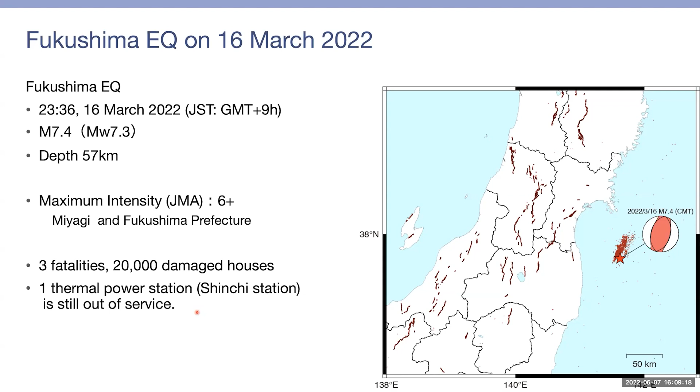This earthquake occurred in the offshore region of the Tohoku area, but this area recorded a very large earthquake in 2011, the so-called Tohoku earthquake. The Tohoku earthquake was an interplate earthquake between the Pacific plate and the North American plate.

But this earthquake occurred inside the ocean plate, a so-called intraslab earthquake. This is recognized by the distribution of the aftershocks of the main shock. The Japan Meteorological Agency found that the aftershock distribution aligned to an eastern dipping fault plane.

Therefore, we can recognize this earthquake has a reverse fault type mechanism, and the aftershocks and fault plane are aligned in the north-south direction. That almost coincides with the direction of the fault plane of the 2011 Tohoku earthquake, but the earthquake type and mechanism are very different from the last one.

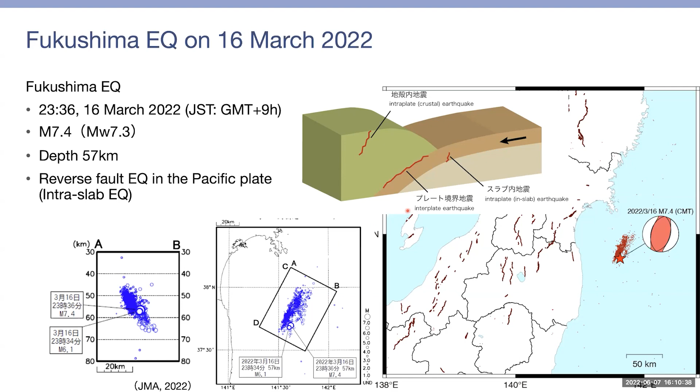But this kind of intraslab earthquake is not minor in this region. A major intraslab earthquake was observed last year in February 2021, at almost the same location of the hypocenter. For example, in this earthquake, the hypocenter is marked with the star in this map, and the aftershock distribution aligned in the northern part of this hypocenter.

But in the 2021 earthquake, the hypocenter was located at almost the same location, but the aftershocks distributed on the other side of the fault plane. This indicates that the 2022 earthquake and the 2021 earthquake have a very similar intraslab mechanism, but the fault is very different.

This earthquake in 2022 ruptured toward the northeast direction, but the 2021 event ruptured toward the southwest direction. That was quite a different characteristic between 2021 and 2022. Also, several different types of intraslab earthquakes were recorded in this region.

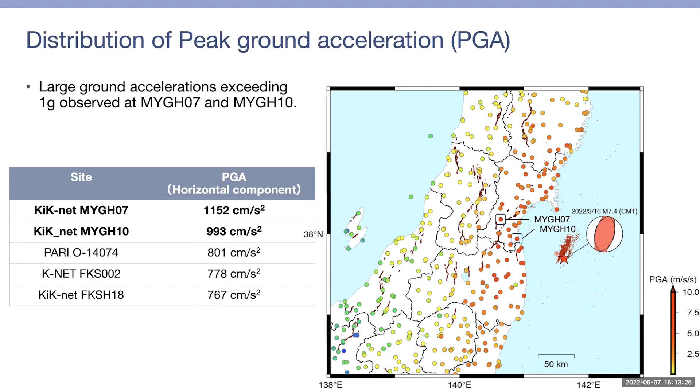Also, the peak ground velocity exceeded almost 70 centimeters per second, observed at MYG H10 and FKS001 stations. Large peak ground velocities were observed around Miyagi and Fukushima prefectures. But the important thing in these peak ground velocities is that large values are distributed along the coastline, north to south in the Tohoku area.

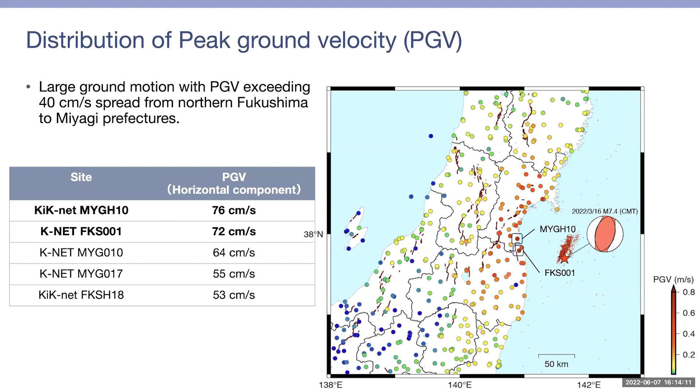To assess the majority or minority of these earthquake records, the peak ground acceleration is compared to very famous ground motion models. The red points indicate the peak ground acceleration compared to fault distance from these models, and the blue points are the peak ground velocities.

MYG H07, which observed exceeding 1.0 gravitational acceleration, was a little higher than the mu plus 1 sigma line of past earthquake records. But the majority of the data almost follow these past ground motion models, and the peak ground velocity also follows the ground motion model.

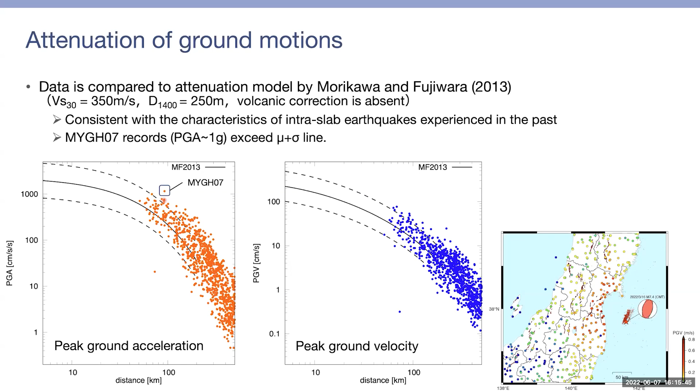This suggests the records of this 2022 event are not from a strange earthquake, but some stations observed somewhat atypical records, for example, exceeding 1.0 gravitational acceleration at this station. Therefore, we need to identify the reason, for example, by comparing with the 2021 earthquake. Looking back at the last earthquake, almost the same trend is seen in the peak ground acceleration records.

MYG H10 also observed large peak ground acceleration exceeding 1.0 gravitational acceleration. This means these types of earthquakes, for example intraslab earthquakes with this depth and hypocenter location, tend to enhance high frequency radiation and the high frequency components of the peak ground acceleration.

Another reason for such very large peak ground acceleration is local site or station responses inducing high frequency components. That is not exactly identified at this moment, but I can show some examples in the past literature. If you are interested, please look at this literature.

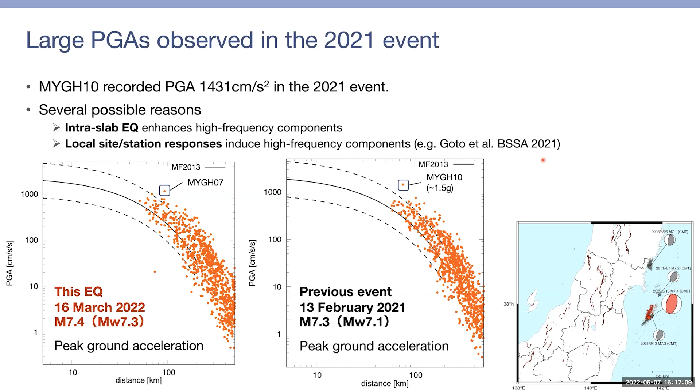For example, you can see it in the FKS 001 station records, and also somewhat in the Miyagi 010 station. I think this is not a doublet at the same location. This is because of the source rupture process. For example, this fault rupture includes two significant asperities, or large slip areas, involved in the rupture process. I think this is why two parts are observed in the records.

I compared the acceleration response spectra of the typical records at the stations. This diagram shows the acceleration response spectra. The spectral shapes, these red, blue and black lines, are quite different in shape. The MYGH10 response spectra enhance very high frequency components, but the MYG010 station enhances components around 1 to 2 second periods. That divergence is a very important characteristic of these earthquakes. But I wanted to point out something about every spectrum.

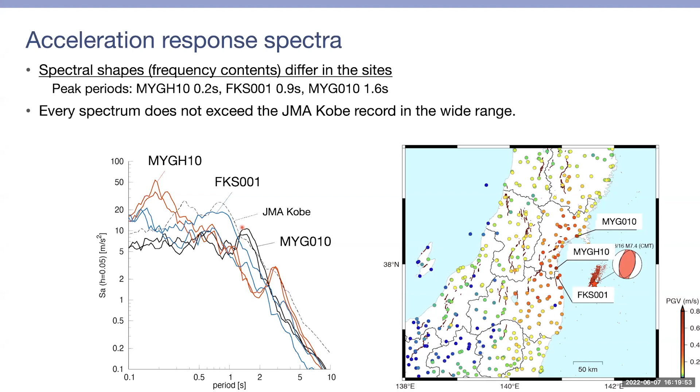Therefore, I cannot summarize all of the reasons the spectral shapes differ, but I think the main reason for the difference of the spectral shape is the difference of the site response of these three stations. Therefore, we need to look at the site response of the stations to discuss the strong ground motions in the region of this earthquake. It is very important to discuss the site response in these earthquakes.

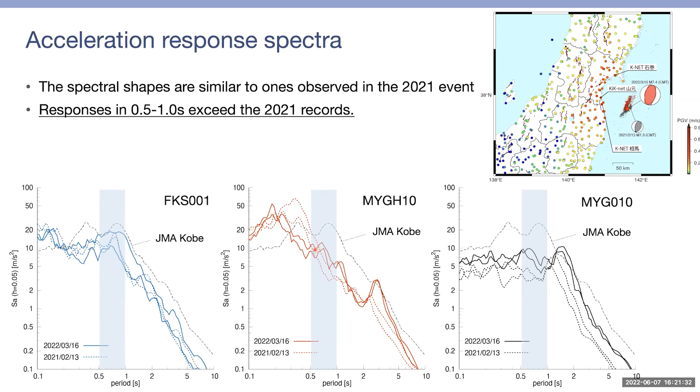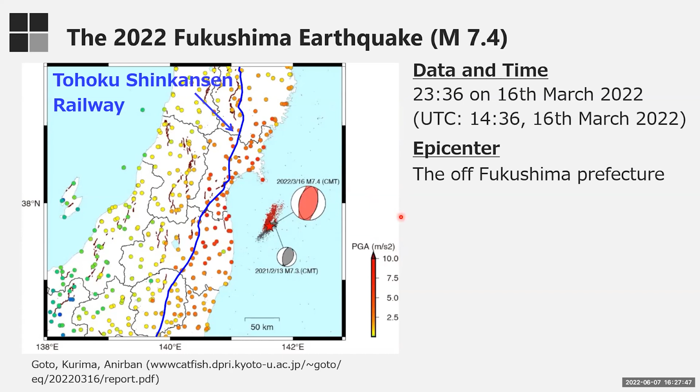Today, I'd like to talk about the damage to railway facilities of the Tohoku Shinkansen line in the Fukushima earthquake. As Professor Goto mentioned earlier, a magnitude 7.4 earthquake occurred off the coast of Fukushima Prefecture on March 16th. This figure is taken from Professor Goto's report. The Tohoku Shinkansen railway is located as shown here, and Shinkansen bullet train derailments and structural damage to piers and viaducts occurred in this earthquake.

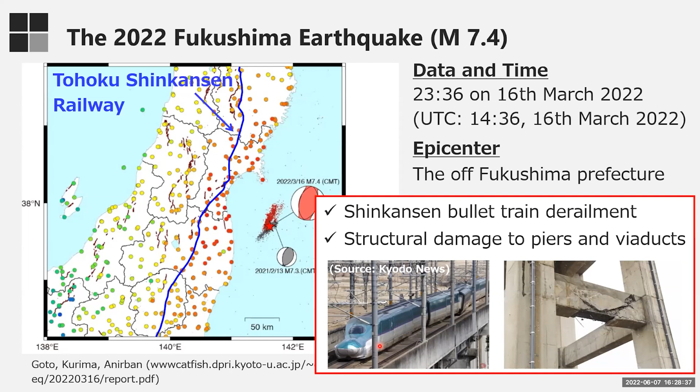So in my presentation, I'll describe the Shinkansen bullet train derailments and the structural damage to piers and viaducts. However, my research is focused on railway facilities, especially structures such as piers and viaducts. So I'll explain the damage to piers and viaducts in more detail than the derailment. Now, first of all, I'll explain the Shinkansen bullet train derailment.

In this earthquake, 16 of the 17 cars of the Shinkansen train derailed, and the maximum derailment of a vehicle was approximately 1,000 millimeters. Near the derailment point, two seismometers were placed, and the observed PGA was 5.83 and 8.11 meters per second squared. Although large acceleration was observed, fortunately no one was killed or seriously injured due to the derailment.

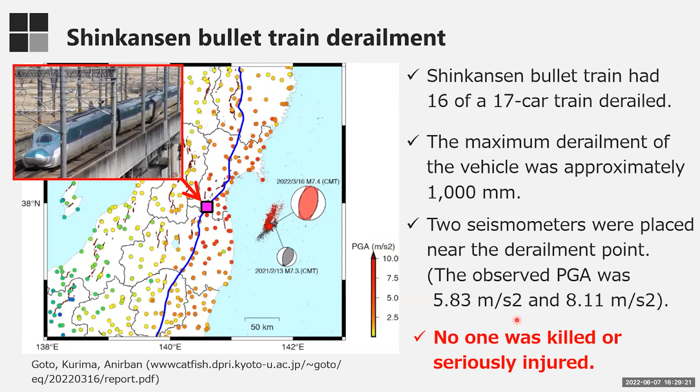This is due to the fact that the anti-derailment guard worked effectively in this earthquake. By installing the anti-derailment guard, even if the vehicle derails, the L-shaped guard hits the rail and prevents the wheel from deviating too far. In this earthquake, the anti-derailment guard was on the rails for 50 of the 60 derailed axles, so it is considered that the guards worked effectively. However, the details and the cause of the derailment are under investigation, so I don't have more information. I'm sorry.

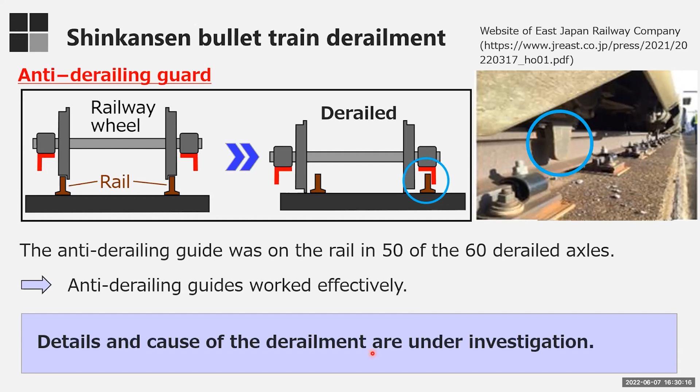Incidentally, after this earthquake, it took 2 months for the Shinkansen service to return to regular. The service was suspended in some sections from 16 March to 14 April. After 14 April, the service resumed with a temporary schedule, and the train ran slowly in some sections. Finally, the service resumed in all sections with a regular schedule on 13 May. The interruption of the service was most likely due to the severe structural damage to the piers and viaducts.

So I'll explain the structural damage to piers and viaducts in this earthquake. First of all, I would like to give a brief overview of its history of earthquake damage. Since its construction, the Tohoku Shinkansen line has experienced several strong earthquakes, causing damage to facilities and structures. For example, in 1978 a magnitude 7.4 earthquake occurred off the coast of Miyagi Prefecture. At the time, the Tohoku Shinkansen line was under construction and suffered much structural damage.

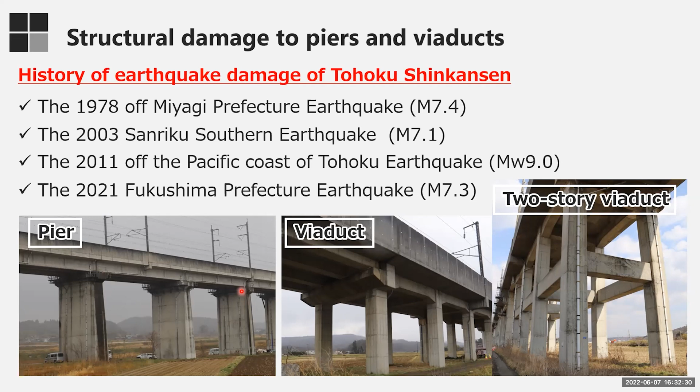So, under such circumstances, last year, an earthquake occurred in Fukushima Prefecture, which is considered to be an aftershock of the 2011 off the Pacific coast of Tohoku earthquake. In this earthquake, only the failure of the two-story RC frame viaduct was confirmed; significant damage to the columns was not observed, and only the failure of the middle beams of the viaduct was confirmed.

Generally, in the two-story RC frame viaduct, the failure of the middle beam occurs first, absorbing seismic energy and reducing column damage. Therefore, the fact that the damage occurred only in the middle beams of the two-story RC frame viaduct can be considered a positive indication that the behavior of the viaduct was following the design concept.

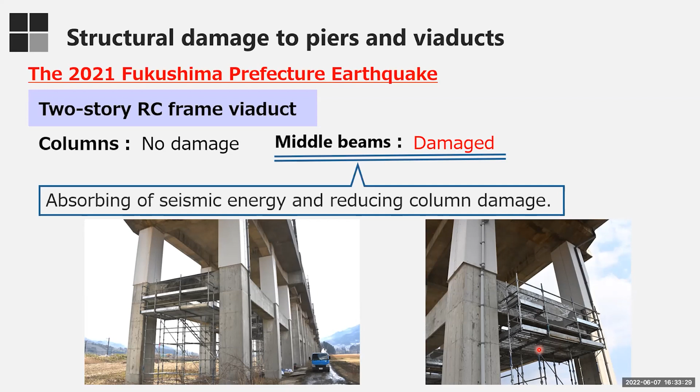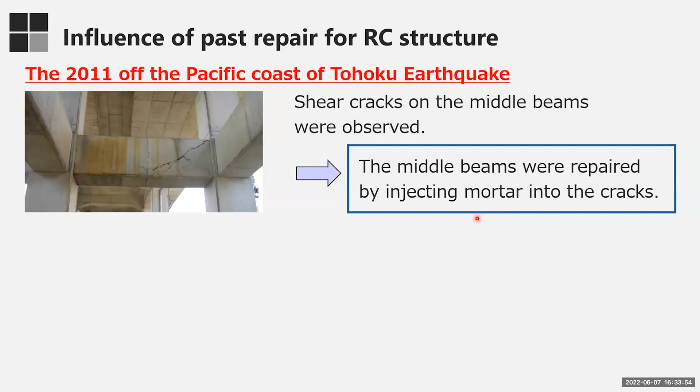However, I think there is the influence of past repairs on the RC structure. In the 2011 off the Pacific coast of Tohoku earthquake, shear cracks on the middle beams of the two-story RC frame viaduct were observed. Subsequently, the middle beams were repaired by injecting mortar into the cracks. Then in the 2021 Fukushima Prefecture earthquake, the shear cracks reappeared along the repair scars on the middle beams. Therefore, there may be an issue with the decrease of the seismic performance of structures that have been repaired in the past.

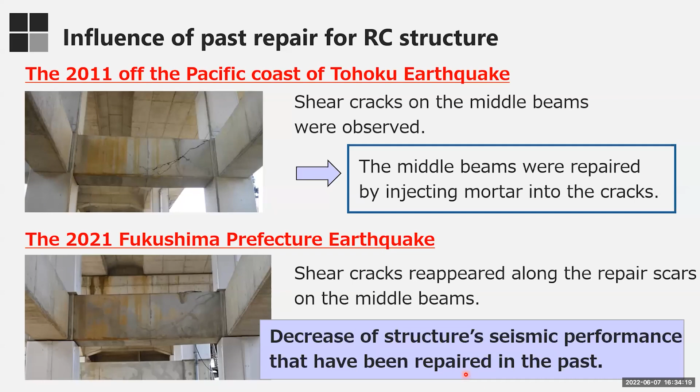With the background of the damage history and the current situation of the Tohoku Shinkansen structures, I would like to explain the damage to the structures caused by this 2022 Fukushima Prefecture earthquake. This earthquake caused structural damage to the middle beams of the two-story RC frame viaducts and the column structures over a wide area. I will describe the significant structural damage in this earthquake. First, I'll explain the damage to the middle beams of the two-story RC frame viaducts.

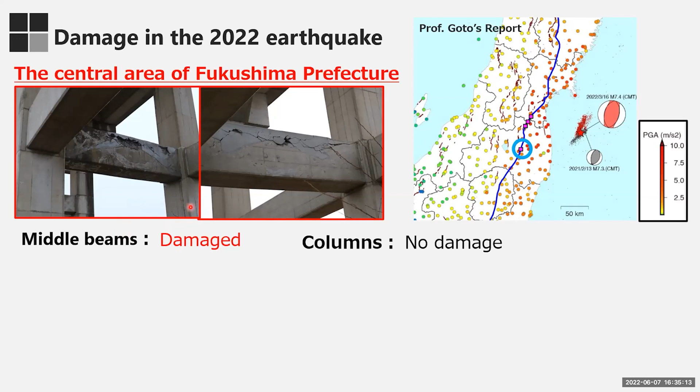First of all, I describe the structural damage in the central area of Fukushima Prefecture. In this area, only the middle beams of the two-story RC frame viaduct were found to be damaged, and damage to the columns was not observed. This can be positively considered as behavior in accordance with the design concept of damage control, where the middle beams are damaged and the damage to the columns is mitigated.

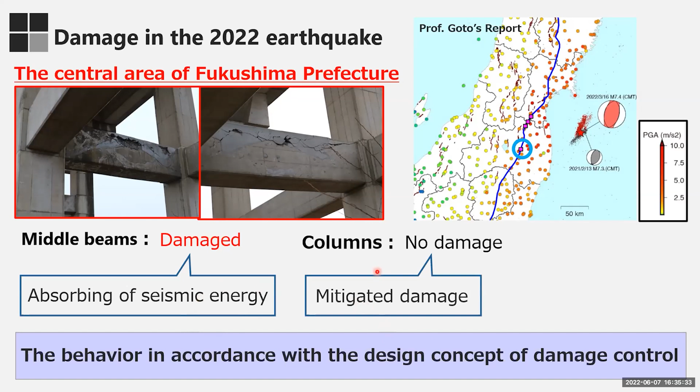On the other hand, the following problem can be considered, I think. The damage occurred only on the middle beams with repair scars. Considering that damage was not observed in the middle beams without repair scars, it is possible that the middle beams repaired after past earthquakes were easy to damage.

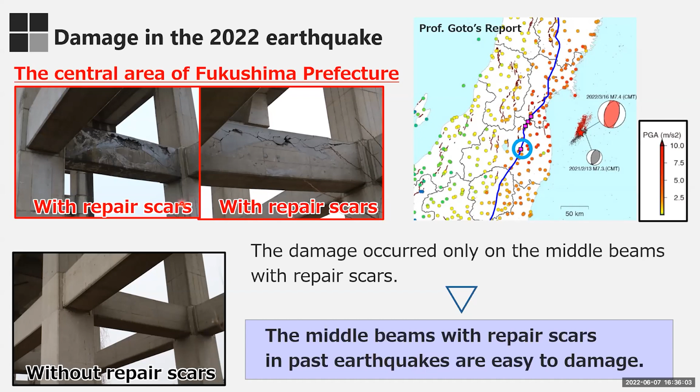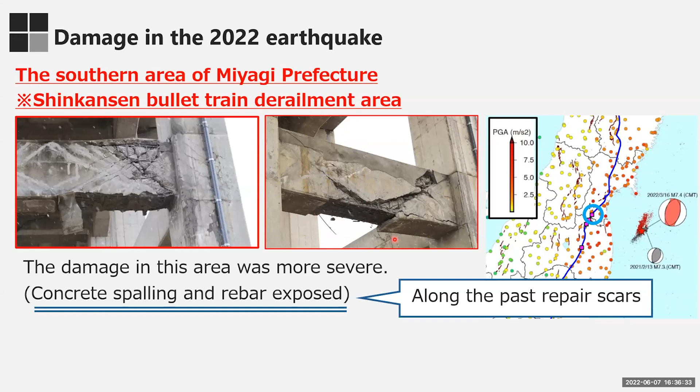Damage to the viaduct was also observed in the area where the Shinkansen bullet train derailment occurred in Miyagi Prefecture. The damage in this area was more severe than in the area shown in the previous slide. Concrete spalling and exposed rebar were observed on the middle beams, and the damage occurred along the past repair scars. So it is possible that the seismic performance of the repaired beams is not adequately maintained, and middle beam damage occurs easily.

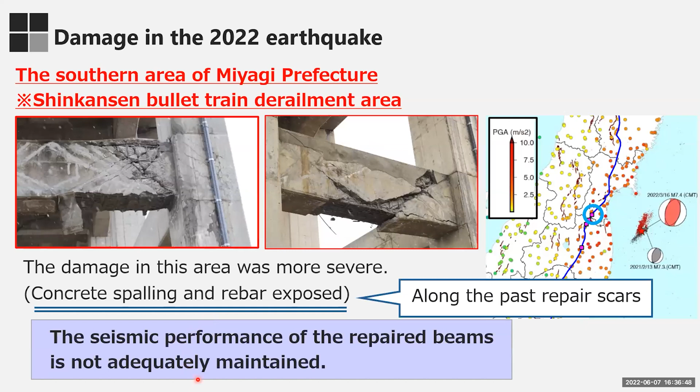Also, these photos show that this structure has been damaged and repaired several times. Looking at the damage to this structure, cracks were observed in the 2011 Great Tohoku earthquake, and the beam was subsequently repaired by mortar injection into the cracks. Then in the 2021 Fukushima earthquake, the middle beam cracked again and was repaired by injecting mortar into the cracks again. And finally, in this 2022 earthquake, cracks along the repair scars were found.

It is noted that there are very few studies on whether seismic performance can be maintained when structural members have been damaged and repaired multiple times. So we must investigate whether structural members repaired multiple times have the required seismic performance.

Here is a summary of the damage to the middle beams of the viaduct in this earthquake. Similar to last year's earthquake, damage to the viaduct's middle beams occurred over a wide area, and concrete spalling and exposed rebar were observed on the middle beams. In addition, the damage initiating from the repair scars caused by past earthquakes was remarkable. Therefore, there are issues regarding the seismic performance of members after multiple repetitions of damage and repair.

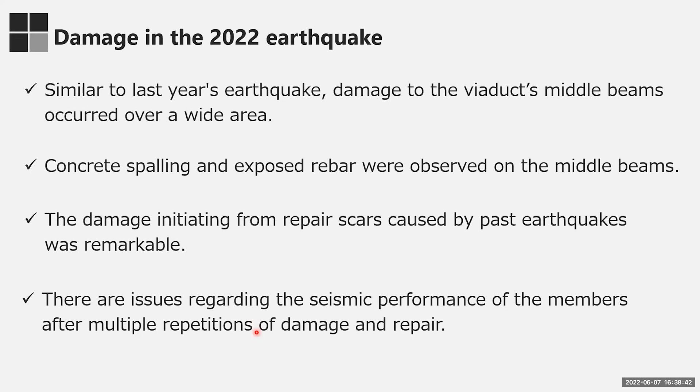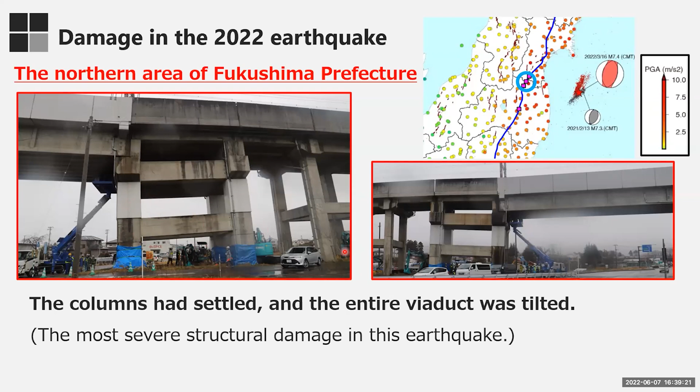Next, I'll describe the damage to the column structures. First of all, I will explain the damage confirmed in the northern area of Fukushima Prefecture. This structure suffered the most severe damage in this earthquake. As you can see, the bases of the columns were covered with blue sheets, so this photo does not show the detail of the damage. However, you can see that the columns have settled and the entire viaduct is tilted.

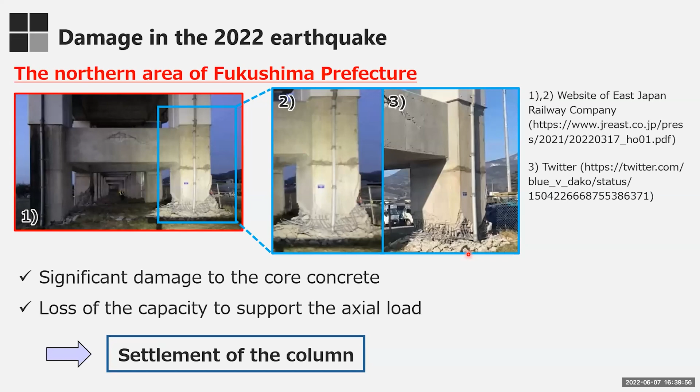And these are the details of the damage to this viaduct. These pictures are from the East Japan Railway Company report and the Twitter of a resident. As you can see, the column has lost axial load support capacity, and the columns have settled. And the diagonal shear cracks on the column caused significant damage to the core concrete. And in this photo, the spalling of the concrete in the diagonal direction can be seen, and the hoop reinforcement was significantly plasticized. So it can be judged that shear failure of the columns occurred in this viaduct.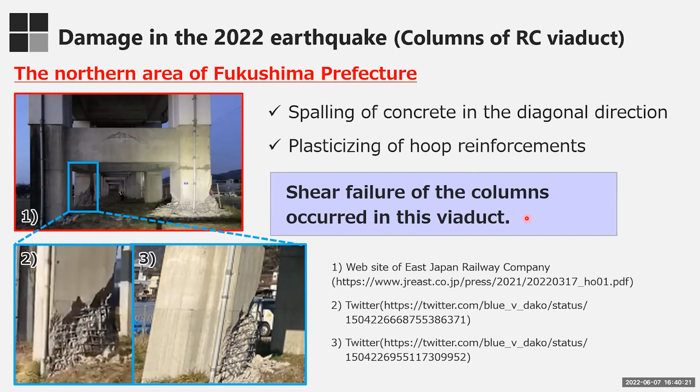Then I describe some important aspects of the damage to these structures. The upper columns of this viaduct were retrofitted by steel plate jacketing. So it means that the seismic performance of the structure was evaluated, and it was judged that the lower columns did not require seismic retrofitting. However, in this earthquake, shear failure occurred at the column. So it is possible that the seismic evaluation for this viaduct was not correct, or the seismic retrofitting of the upper columns resulted in the structural weakness being shifted to the lower columns. So there are issues regarding the decision to seismically retrofit the structures and the judgment of the seismic performance of the entire structure after the retrofitting of some components.

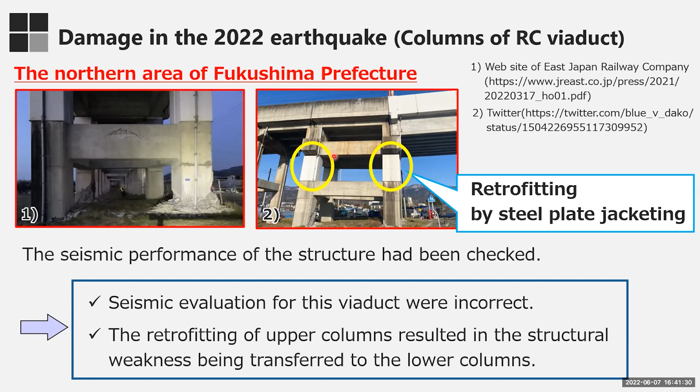And damage was also observed in the columns near the Shinkansen bullet train derailment area. In the case of these columns, buckling of longitudinal bars at the base of the columns occurred, and it can be concluded that flexural failure occurred. Therefore, unlike the shear failure columns introduced in the earlier slide, this failure mode was ideal. On the other hand, it is important to consider whether the ground motion was large enough to allow the occurrence of the failure of the columns.

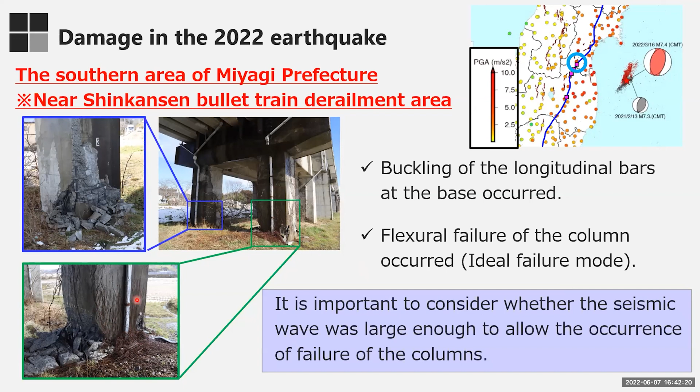And in this area, the neighboring column had been seismically retrofitted. No damage was observed in this structure with seismic retrofitting. It is clear that the seismic retrofitting functioned effectively. On the other hand, it is necessary to examine whether seismic retrofitting of the flexural failure columns is necessary or not.

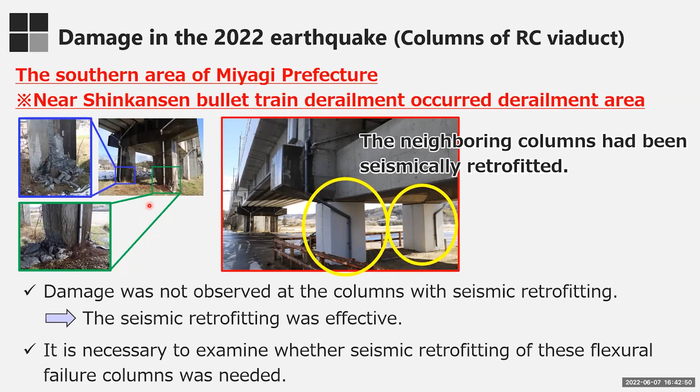And moreover, there is a structural similarity between the shear failure viaduct and the flexural failure viaduct. Both columns were supporting a large girder, as you can see. It is possible that the weight of the girder was so large that the large inertial force caused the column to fail. So it is necessary to examine the relationship between the extent of the structural damage and the magnitude of the ground motion in detail.

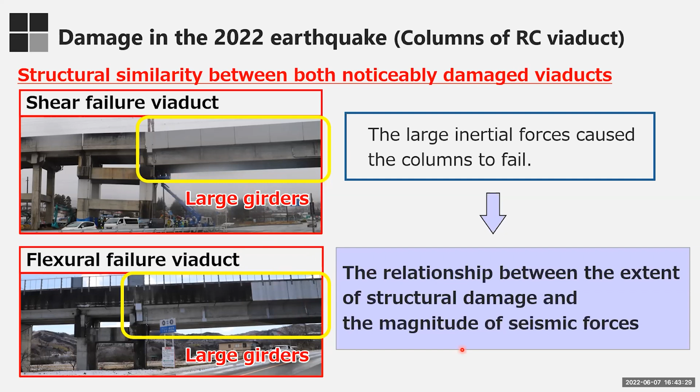Also, in other areas, the longitudinal bars buckled and the concrete spalled. Such failure was observed in a broad area. On the other hand, damage to seismically retrofitted columns was not observed. For example, in these columns, the neighboring column had been seismically retrofitted, and damage was not observed in those columns. The fact that the damage occurred only to the non-retrofitted columns is common with the damage in other areas.

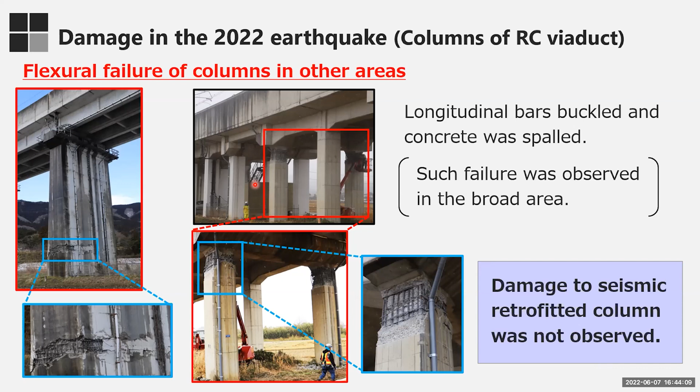This is a summary of the damage to the columns of the Tohoku Shinkansen structures in this earthquake. Shear failure of the columns occurred in the RC viaduct. So there is an issue regarding the decision to seismically retrofit the structure and the judgment of the seismic performance of the entire structure with some retrofitted components. And the damage occurred only in the non-retrofitted columns, while damage to the neighboring retrofitted columns was not observed. Thus, it is necessary to investigate whether seismic retrofitting of the damaged columns was needed or not.

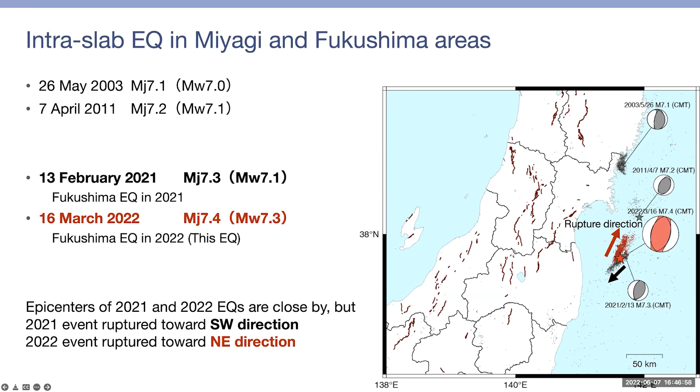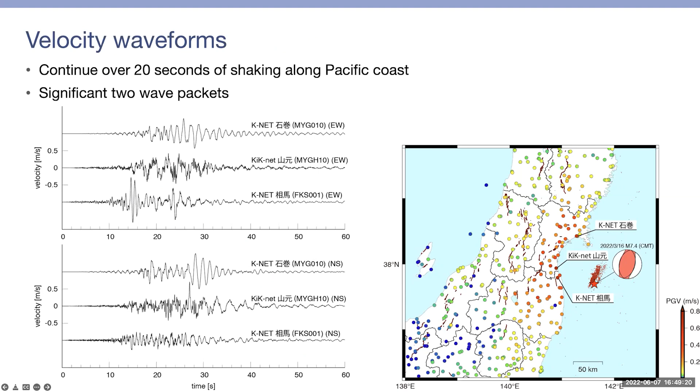Wonderful. I also have another important question comparing 2021 and 2022. So let's take a look at that. 2021 versus 2022, and there we are seeing 2021 is much lower than the 2022 earthquake. Was that rupture propagating towards land, maybe related to rupture directivity, I'm assuming? Yeah, that's true. I compared the differences of these earthquakes. So, as you mentioned in the question, this earthquake ruptured towards the north, and the last 2021 earthquake ruptured towards the south.

I compared the difference in the spectrum of the ground motion of these 2 earthquakes. Red indicates larger spectral amplitude compared to the 2021 earthquake. This means the northern part of the Tohoku area is much higher than the southern part, so the 2022 earthquake was enhanced compared to the last earthquake. The reason is not exactly clear, but one possible reason is the forward directivity of the north rupturing. And also, of course, the distance is different. For example, this region is very close to the fault plane itself, so that is a little different from the last earthquake.

Are they both dipping towards the northwest? Yes, that is exactly the same. The dip direction is the same. So the red dots are where the rupture is essentially, right? Yeah. And that's 2022, and the other one is 2021. So it's slightly closer to the land, which is probably one of the reasons why. Yes, right. But what about the rupture direction? Are they both rupturing more or less the same way? Yeah, I'm not sure how we can separate the two effects, the difference in distance and the effect of forward directivity, but we need to discuss and analyze this more.

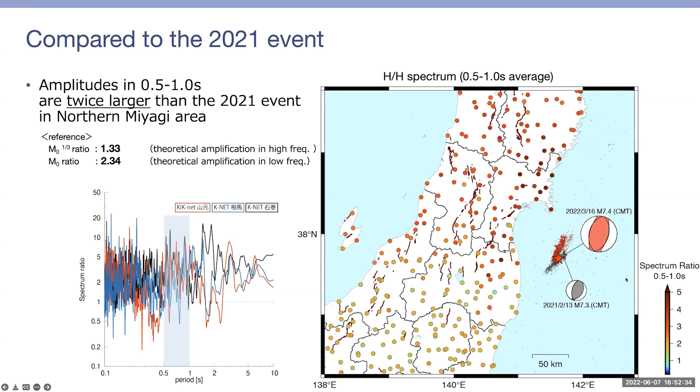Let me ask you this. If you look at the stations to the south, towards the rupture direction, I bet you would see a different picture there. Yeah, I think that is very simply answered by this slide. It is the same map as I explained earlier. The blue star means the 2021 earthquake. Can you see the blue dots in the southern areas? That means in this area the 2021 event produced the largest records, including compared to the 2022 earthquake. That was maybe related to the forward directivity of the last event, I think. I see. This makes a lot of sense. Okay, so the intuition is correct. This is amazing. Thank you so much.

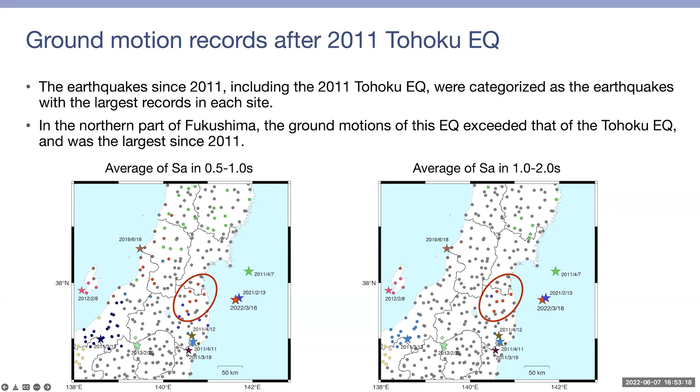And I have a question for Kato-san.

Also, surprisingly, the damage to the Shinkansen looks like the operation was hampered for a month, completely hampered, and then another month with maybe a low level of speed. So it's a 2-month interruption in that structure. So that's incredible.

One important thing that I saw is that you had a beautiful three-earthquake comparison figure. Maybe you can share your screen as well. So you are showing damages from 3 earthquakes: 2021, 2022, and then Tohoku. And if you cover the title, I bet nobody would guess which earthquake is which in terms of damages. Everybody would go for the 2022 earthquake as being the Tohoku damage.

In the area where the Shinkansen bullet train derailment occurred, or the shear failure of the column was confirmed, the damage to the structures was larger than that caused by the Great Tohoku earthquake in 2011. And I would like to talk about the relationship between the spectrum and the structural damage. Okay. Just a moment.

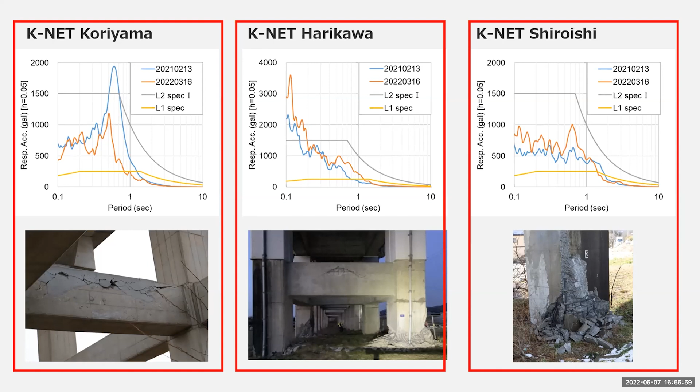So anyway, this figure shows that the seismic waves, the ground motion observed in this earthquake, were somewhat large for the railway structure, but it is being investigated whether such damage was allowed to occur or not. So what we are basically seeing is larger than 1.5 G shaking for high frequencies, right?

Yeah. And many electric poles and rails were damaged in a broad area. Those damages caused the suspension of the Shinkansen bullet train service for a month after the earthquake, I think. How about damage to the tunnels? Do you have any observations of damage in tunnels? I think no significant damage to the tunnels was observed. Mostly the bridges and viaducts and structures like that.

Another thing that you have also shown is that this steel sheeting, I think, or jacketing for retrofitting the structures potentially transfers the damage to the bottom section. Perhaps the upper part of the columns could be a little bit more flexible, but it's so stiff now that it potentially increased that.

Did you see any area that has a similar structure, one with retrofit and one without retrofit? I guess what I'm trying to get at is, can you show a case of how the retrofit performed, what would happen if the same structure were exposed to the same shaking without retrofitting, and what happened with that kind of retrofit?

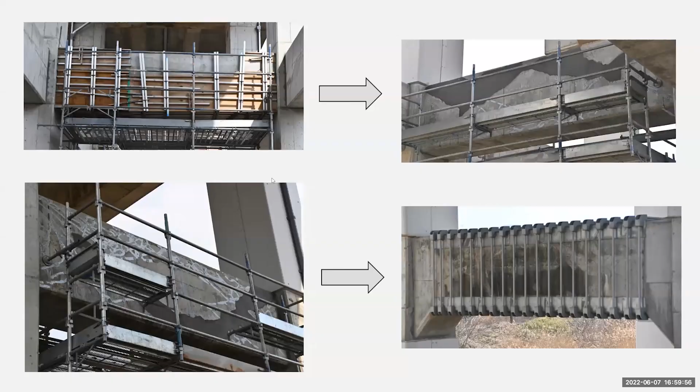Okay, so let me ask you another thing. With this steel jacketing, is it possible that there's damage inside that you are not seeing? Could be, right? Yes, you're correct. So in order to check the damage after the earthquake, the RB retrofit is conducted. This retrofitting enhances the shear strength of the structural member, and we can see the damage at the time the earthquake occurred. So this method of seismic retrofitting of structural members was conducted in a broad area in the Tohoku area.

In other words, if there were damage, you would be able to see it because you are able to remove the metal jacketing to see if there's damage. Okay, perfect. That actually answers the question.

I would like to ask Bruce to continue a few questions. Well, okay. Thank you very much. I may have one question. We're drawing to the close of our time, but

This would be to Dr. Kato. The damage to the columns and beams that you've described, is this an acceptable response? In other words, are you considering changing your design criteria? Because again, your structure was damaged 10 years ago, repaired. 10 years, we have another earthquake. Again, we see similar damage. It seems to me for such a key system as your bullet train that this would be something you would want to circumvent going forward. So has your design criteria increased as a result of these observations?